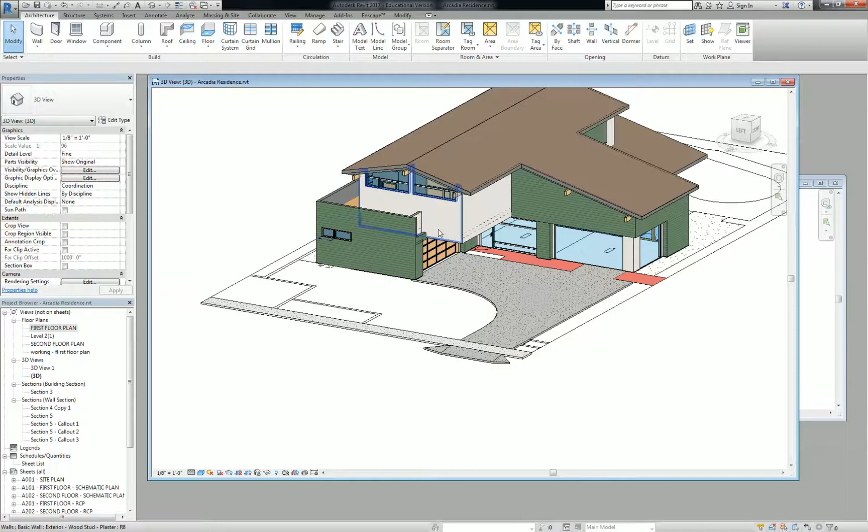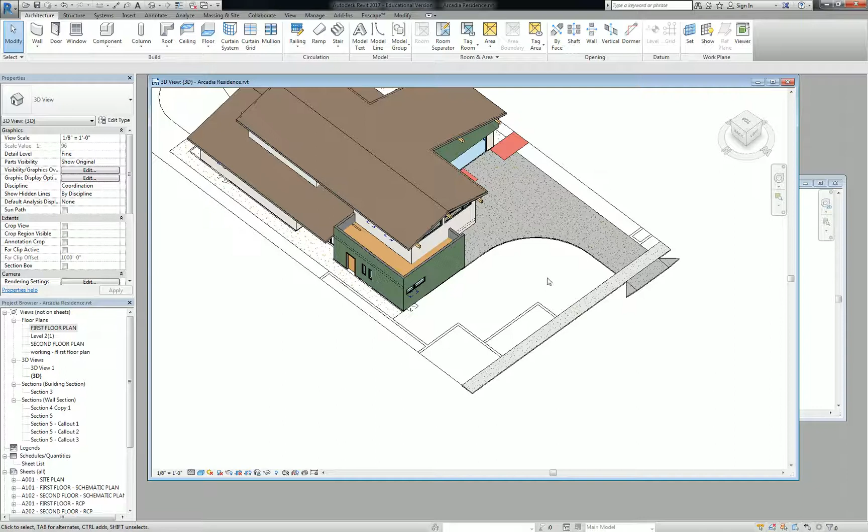Next up, we're going to do some landscape stuff. But before we start, I want to do some of the hard elements like retaining wall elements that you're going to see for the landscape. So what we have on this side of the building is a set of CMU retaining walls, and then it flattens out on this side. We're going to cascade some of this retaining stuff down, and keep it simple. If this is cascading, we have to consider a few things, but let's start off by actually just drawing the wall, and then we'll go from there.

So go to wall, and just scroll up or down. Let's do generic 8-inch masonry. Let's double check that that actually is the CMU material. Yeah, good, concrete masonry units. Okay, good.

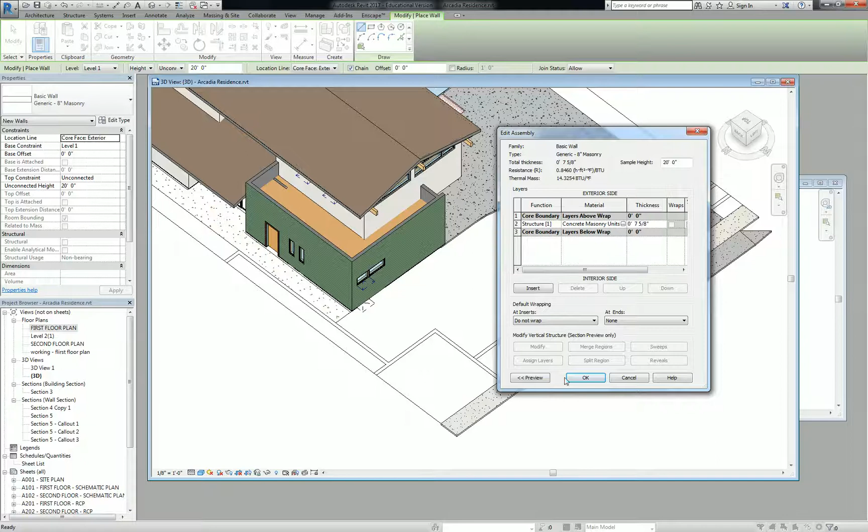What I'd like you to do is just trace your CMU walls across each of these. Notice how when you draw the wall, it's going to justify to one side. So just draw all the walls and then we'll sort of size them later. I'm just going to do it this way.

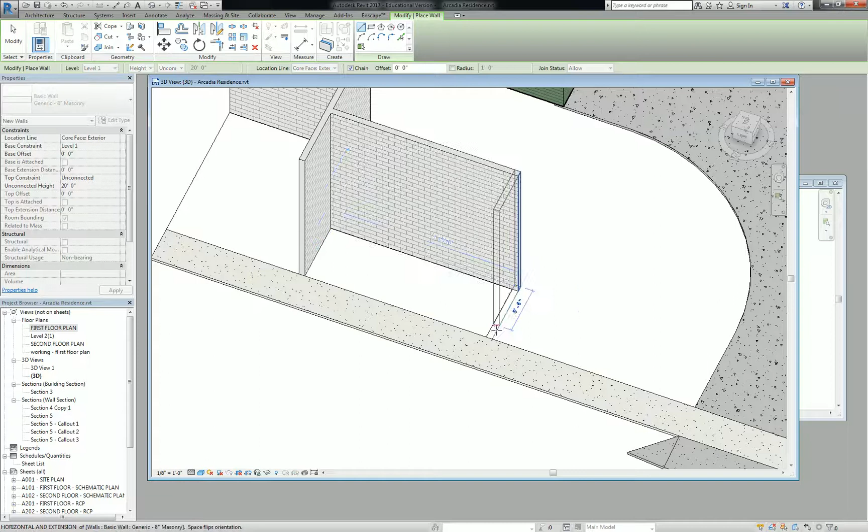There we go. So because we have this one in the corner that's square, and then these other two small ones that fan out to a more flat area at the base of the building, I'm going to understand that to mean the square one in the corner is the highest of the three, and it's literally terracing down. That's a total guess, a design move I'm just trying to extrapolate from what I see in the file.

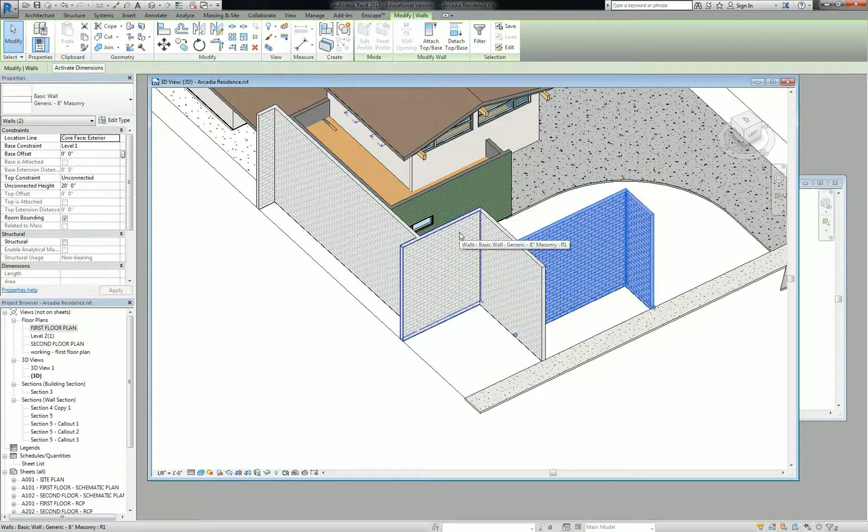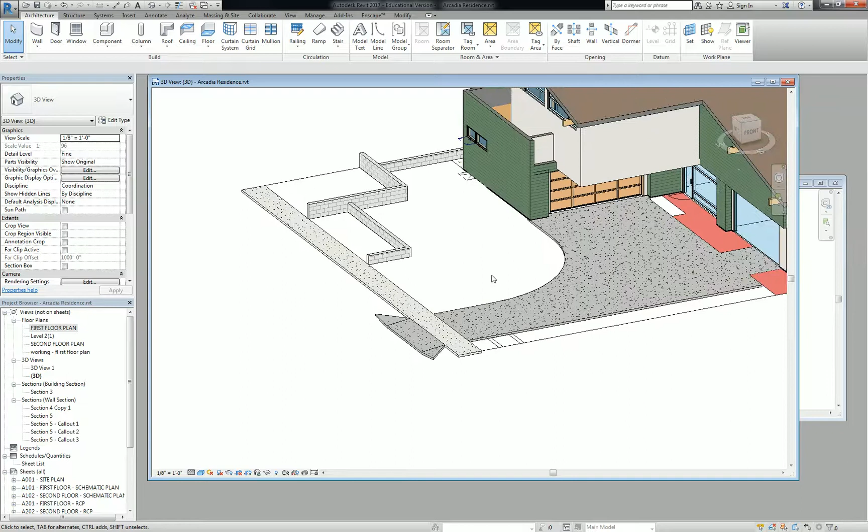So what that means for me is I'm going to assume each of these on the side is only a maximum of about 18 inches tall. And this one I'll make 30 inches tall. It's not much - it looks pretty subtle in our three-dimensional model, but it is something that's going to be important for us.

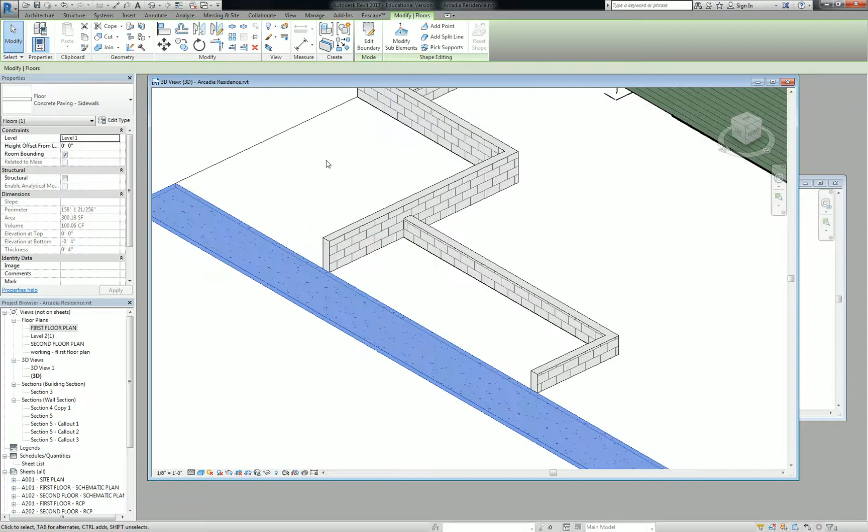Okay, so we've got a couple things to do here. We need to put some infill grasses and stuff like that, but I also want to point out that we have a sidewalk here. So if we're going to put grass in this area and it's being retained by that wall, that means it actually has elevation somewhere, somehow. So it either needs to taper off down to the sidewalk, or we need to retain it from leaking out over the sidewalk. It's kind of up to you to decide what you want to do with that.

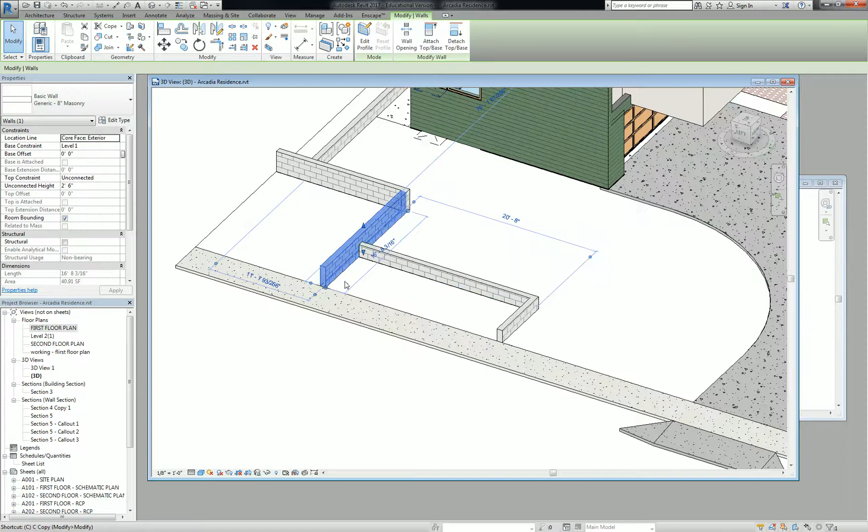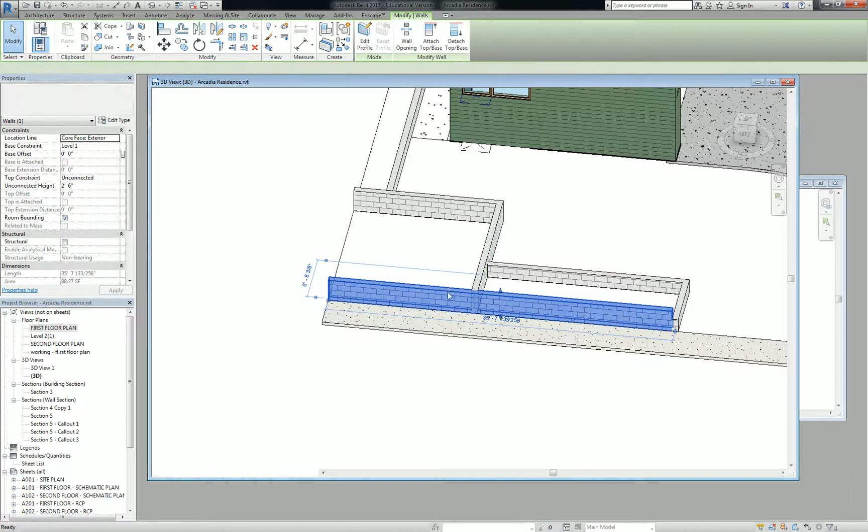I think what I'm going to do to keep it simple is just draw another wall along the edge of the sidewalk. Oops, drew it on the wrong side. Okay, do another one there. Notice how when I draw this wall and drop it here, it actually joins the walls into one wall - that's kind of a Revit hard-coded thing. If I create similar on the smaller wall, it'll borrow that height. So I'm just going to select that one and draw it there instead, so it won't read it as one single wall. That's the design move I'm going to take.

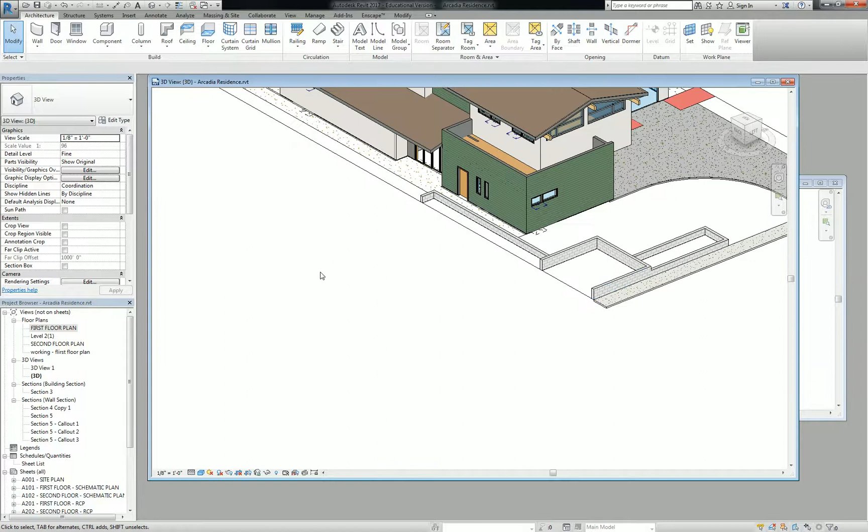I'm not going to retain it outside. Right now I don't know what we're going to do on the outside of the site, but we'll just kind of emulate what's happening over there somewhere. Okay, what questions do you have so far?

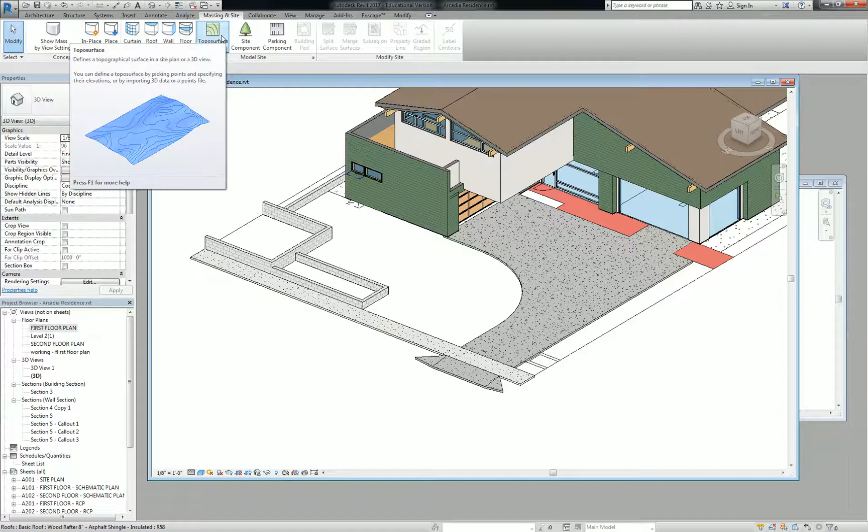All right, let's get into some turf. Turf can be made - let's go to the massing and site tab. You have a few ways of approaching this. I'm going to keep it really simple for us because our site doesn't have drastic topography, and we're just going to modify it slightly. So you can use a toposurface, or you could just use a floor. For us, we're going to use a floor type and call it turf. If you're using a toposurface, we'll get there later. Let's do the floor version, then we'll do some toposurface stuff later.

So create similar on your concrete. Go to edit type, duplicate it, and let's just call this turf.

And in case you're wondering, turf isn't like fake AstroTurf, it's just grass. I was wondering, I was searching whether it was a turf. Yeah, we're creating a mini football field in our front yard.

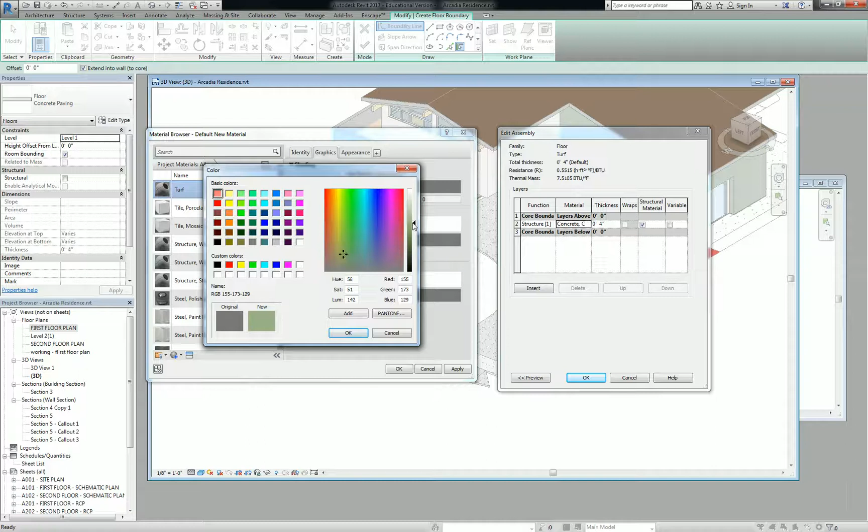Okay, I don't know if there's already a grass material in here. Looks like there isn't, so let's create a new material and rename it to turf. You generally want the turf to show up like a green color - I would imagine you do. Turf generally isn't solid green, it's more like an olivey green or something like that, and I don't like to overwhelm the model colors with super saturated colors, so I try to desaturate it quite a bit.

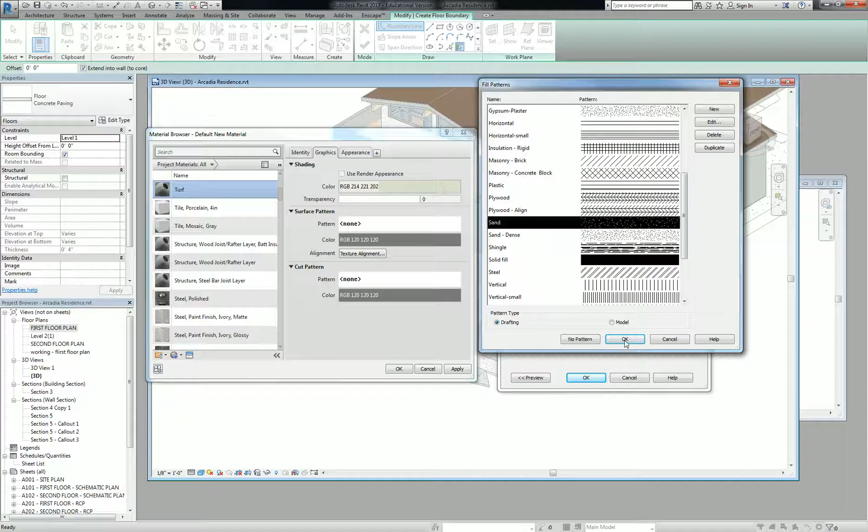The other thing I want you to do is pick a surface pattern that's indicative of turf, if there is one - I don't know if we even have any in here. Guess not. Let's pick something that's just like dots or something. Ugh, we have terrible patterns here. All right, let's go with sand for now - that'll work, and you can just leave that the way it is. Oh, whoops, did I just cancel that? Crap.

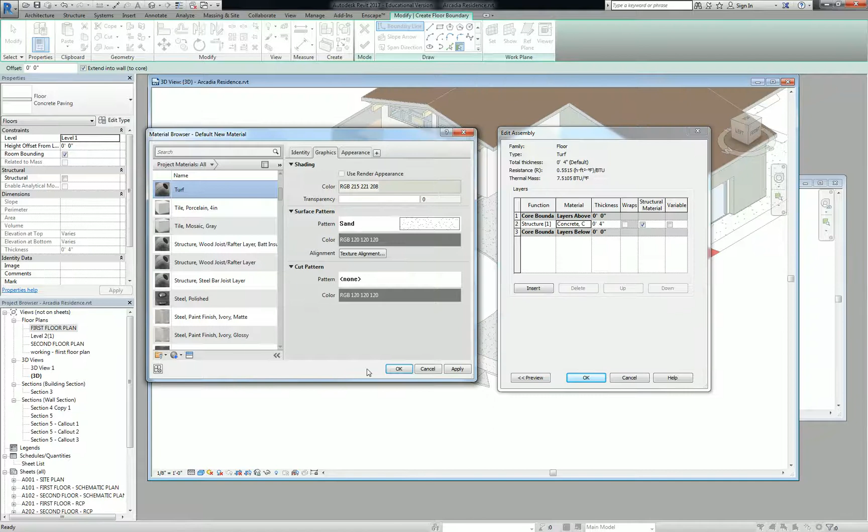Okay, cool, so let's just kind of have at it. What I'm going to do is infill this area right here, so we're going to pick everything up to that wall. I'm going to pick that face of this wall, the outside face of that wall, outside face, outside face, outside face.

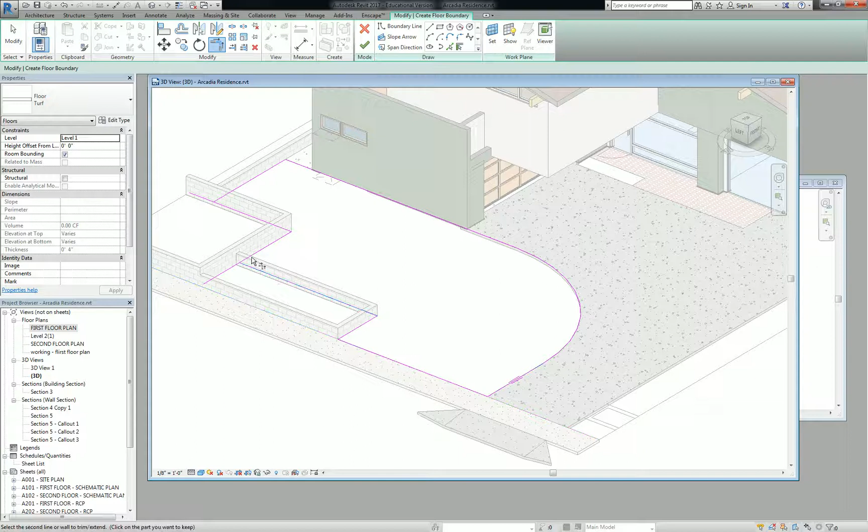Once we complete this pattern, you'll see that it's really just a surface that fits into all of this. Right now it's just a dead flat surface. What we're going to do is modify the sub-elements so that we can create a little bit of topography that's going to drain away from the building, and it's also going to drain down here to the sidewalk. That's very important.

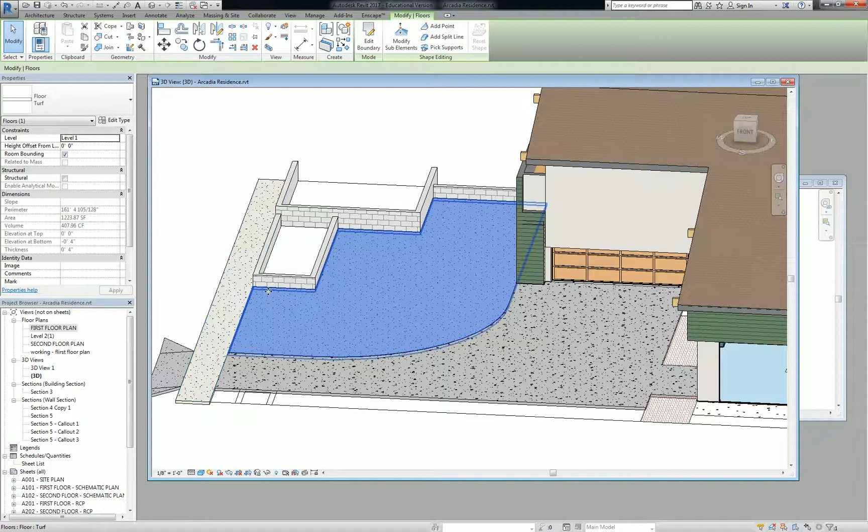So we need our highest points to be back here. We also have a sidewalk back there, which doesn't really work out perfectly, but we'll emulate it somehow. Let's pretend that the sidewalk is at a higher elevation back there for now. So what we're going to do is modify the sub-elements here.

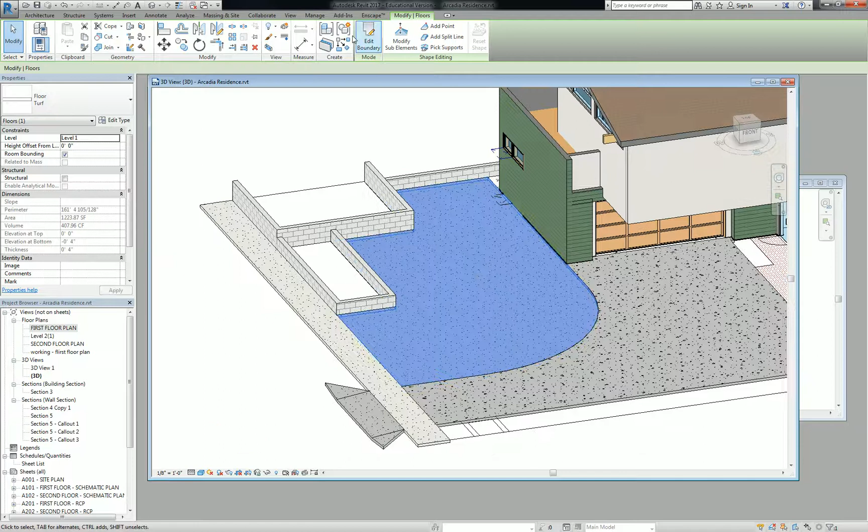I'm going to start off by just raising the surface in the back that I don't want any of the water to go into, so I'm going to raise this to like 15 inches. That immediately raised the surface fairly significantly up to that point.

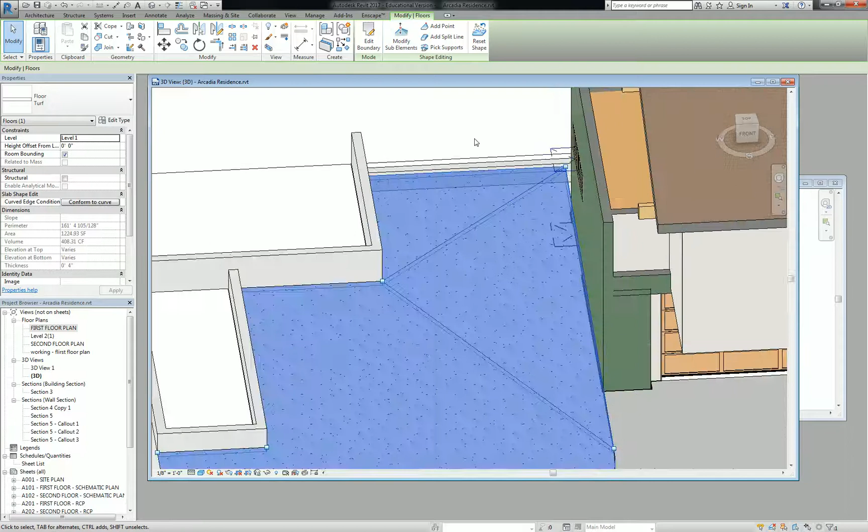We can keep modifying sub-elements in order to create the same kind of slope that we're looking for. Notice, though, that we have sort of an edge here that we need to be concerned about. As that is elevated, we need to add or introduce sub-elements in order to mitigate that problem.

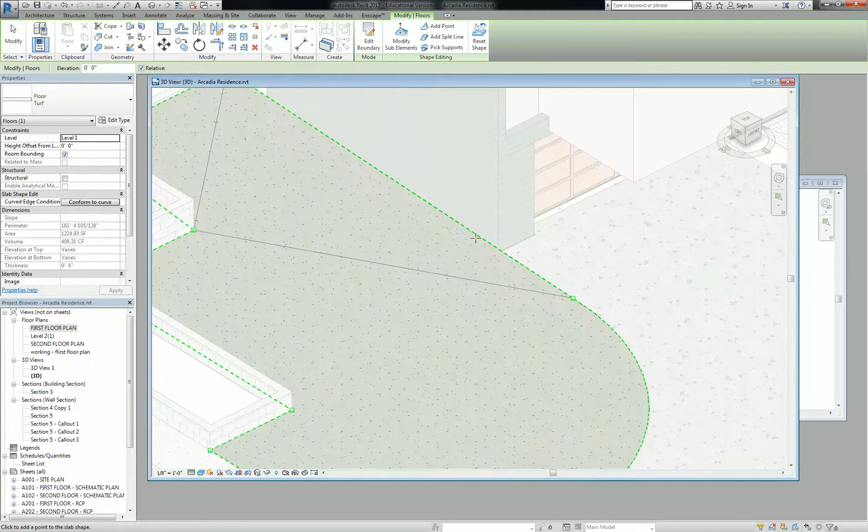Modify sub-elements, we're going to add a point right there. Make that zero.

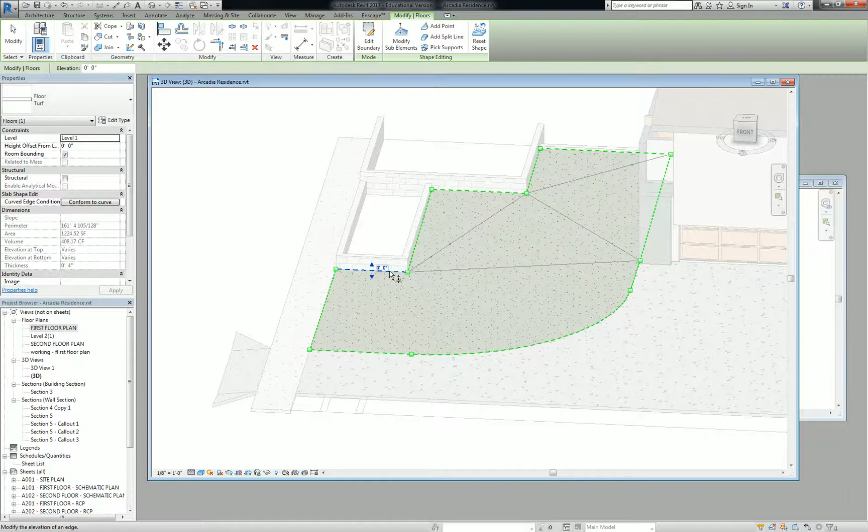The other thing is everything back here, you want it to go high, but not as high as the one before. So we're going to change this one to like 11 inches, and then I'll change this one to like 6 inches.

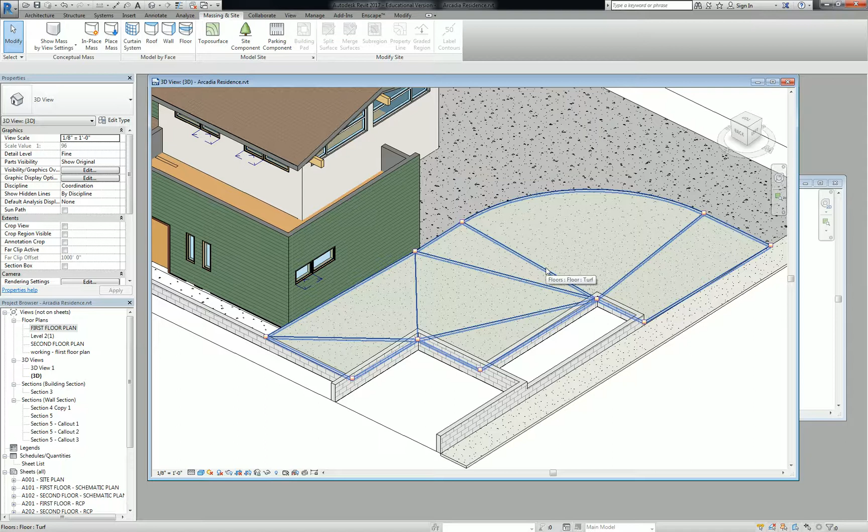Okay, so now everything, and it doesn't create an actual topo. You guys need to understand that this isn't going to create something that has that nice topo you're looking for. A topo surface is going to be better for that. But what this does help you do is rectify the relationship between surfaces as you're trying to model for drainage or something like that.

So if you need to get rid of some of these lines, you can do it by going to the Modify tab, and you use the line work tool, and you can switch this over to invisible lines, and you can get rid of some of this stuff.

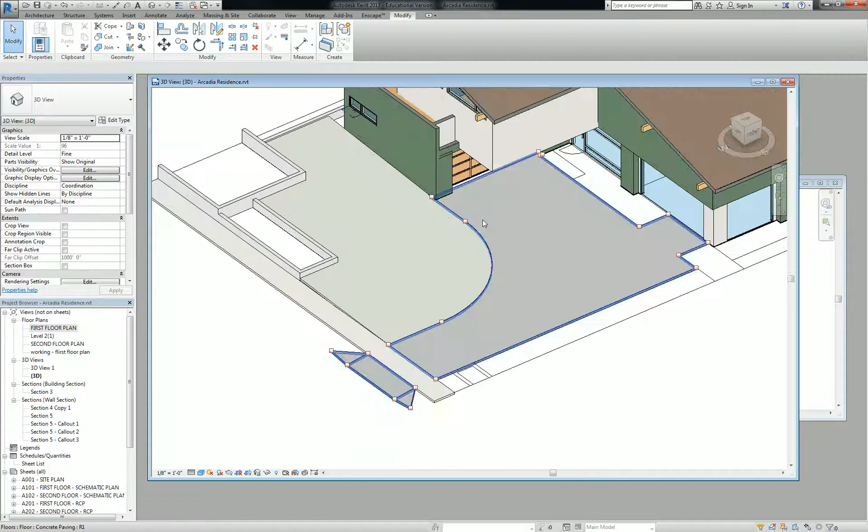So even though it's kind of a silly little triangulated topo and it's not exactly accurate, you can still sort of emulate the visibility of it being sloped without being distracted by the triangulation. So this is an inaccurate method, I want to point that out very clearly.

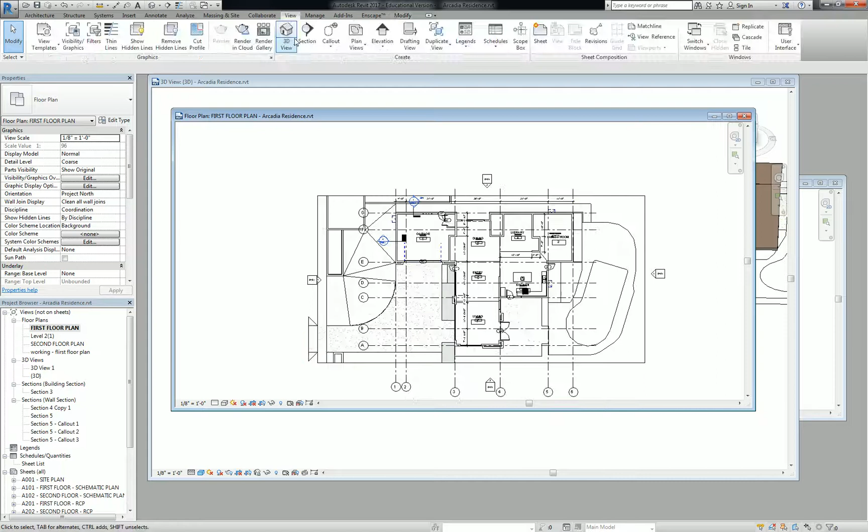This is really just something that we use, and I'll show you why we do this. It doesn't have to be super accurate for us, because really all we use it for is to go into something like a floor plan and take a section, cut it through somewhere like that, and go to that view, and that gives us a quick topo that shows some of that gradation. That's what this kind of thing is used for.

Does that make sense? Yes, Kevin.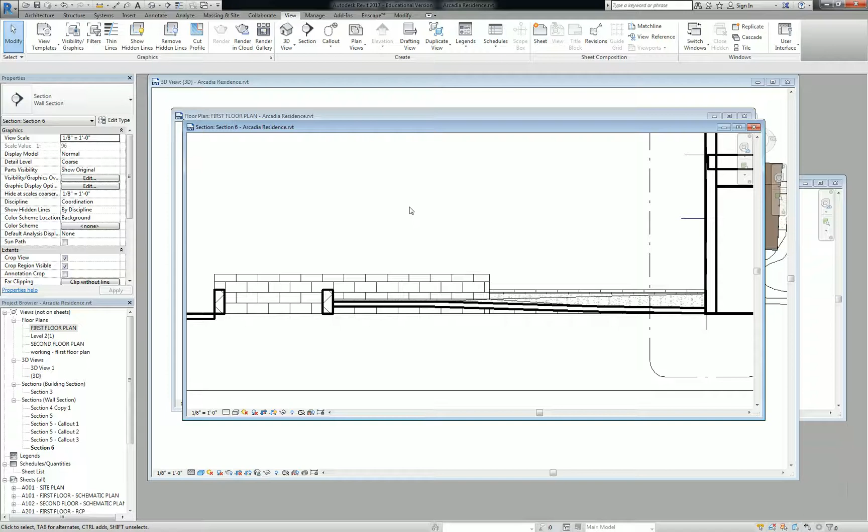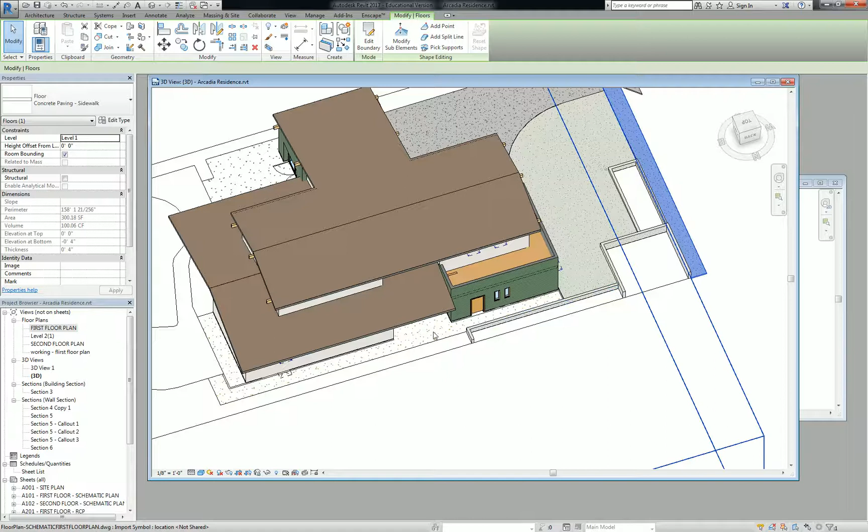All right, cool, so what I'd like you to do is take this idea a little bit further and develop what's happening in this planter condition. I think what we're going to do for this back sidewalk is we're going to slope it down from that point to the door, or slightly beyond the door, and then it'll be slightly below the building for the next section.

I'm going to create similar, and I'll let you guys carry this forward, but let's see, we're going to do that, that, and that. I'm going to stop this one here.

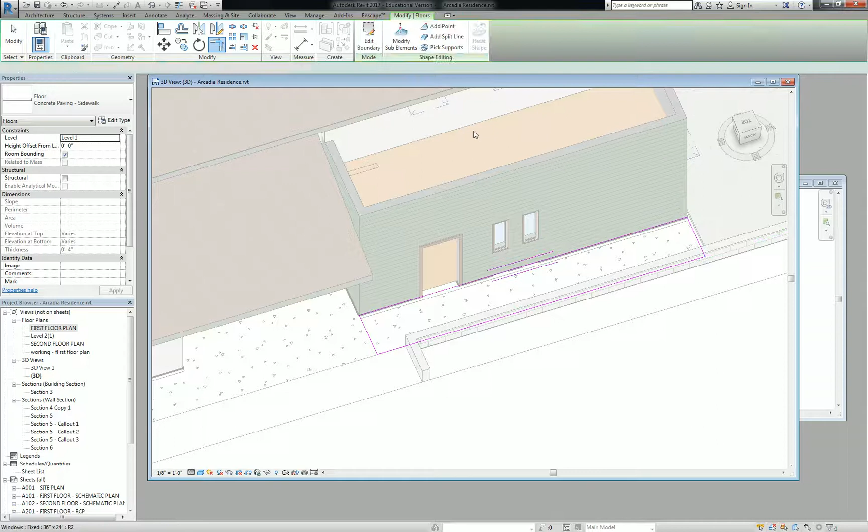And this one, modify those sub-elements. This one's going to go up to 11 inches, or no, that was 15 inches, right, 15 inches. I'm going to add a split line, or not a split line, sorry, add a point there, add a point here.

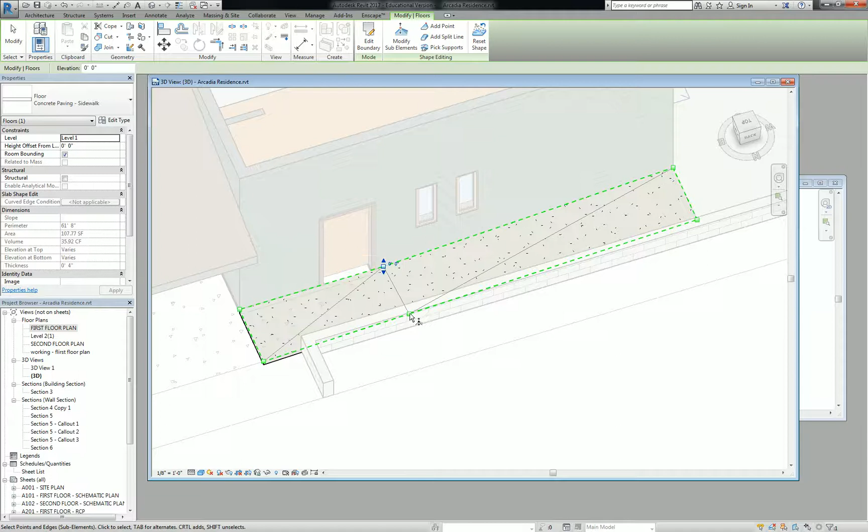We'll put this down to zero. And then, theoretically, let's keep it simple, okay. So this sloped down to zero, and the reason it has that triangulation line is because those two points that I put in aren't exactly aligned. So if it's not exactly aligned across the perpendicular, it's going to create a little triangulation.

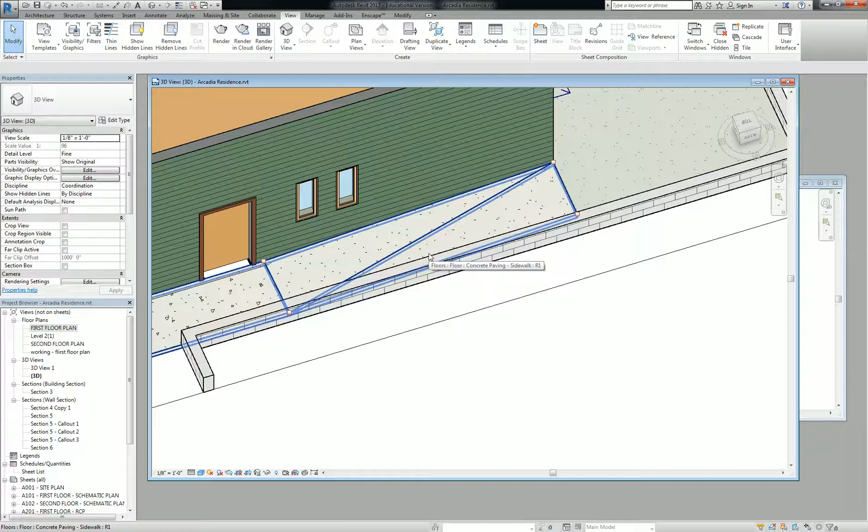But anyway, I just wanted to show you that you can very easily rectify the relationships of these surfaces just by doing something simple like that. So that ramp is actually now sloping down to the door. I don't know why that sidewalk even goes that far up, but whatever.

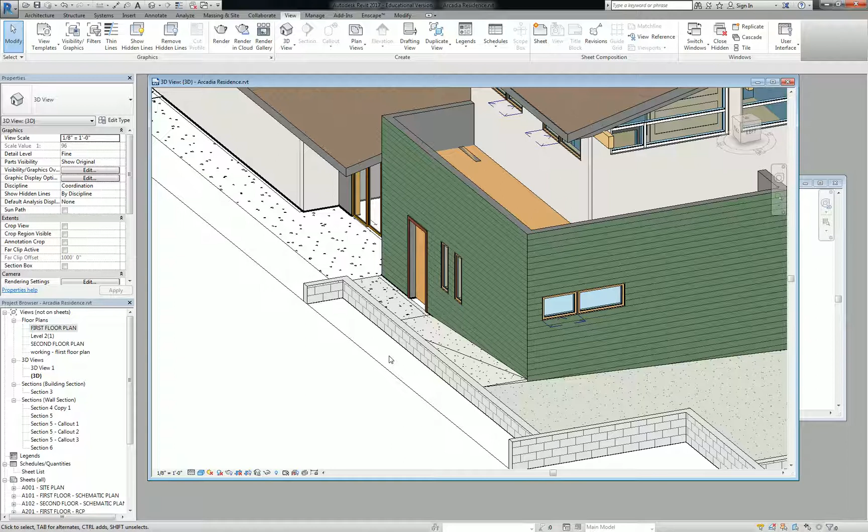So what I'd like you to do is populate these three planters in the front yard with some sloping turf using a floor family, and then we'll kind of explore some other methods. Any questions? All right, you're welcome.